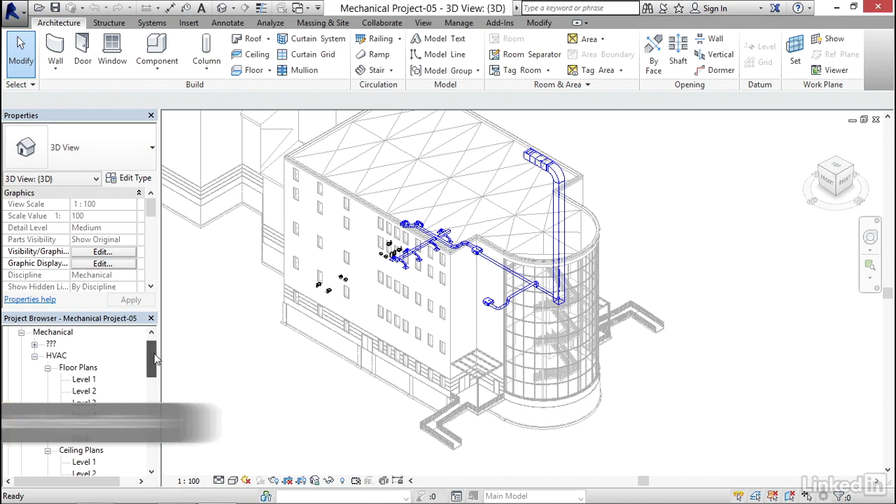In this video, I'd like to create a return duct system. The challenge here is, although we only have a little bit of ductwork in, we're already starting to get pretty congested. So I'm going to scroll down to Ceiling Plan Level 1 right here.

I'm going to scroll into my VAV. The problem is, my return is coming out of here. I don't have enough room to loop it around here, so I guess I've got to come down here. I've got to go up and over, and route it down that way. Okay, we can do that.

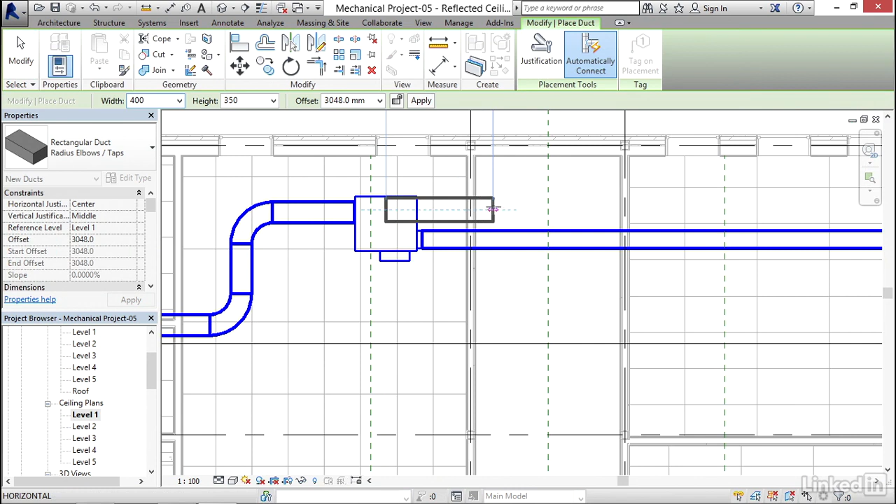I'm going to select my VAV. Now I'm going to go ahead and click on the Create Duct button. I'm going to come out to about here, and I'm going to pick a point. I've got to come down this way, but what I need to do is alter my offset. I'll go 4267. Hopefully that's high enough.

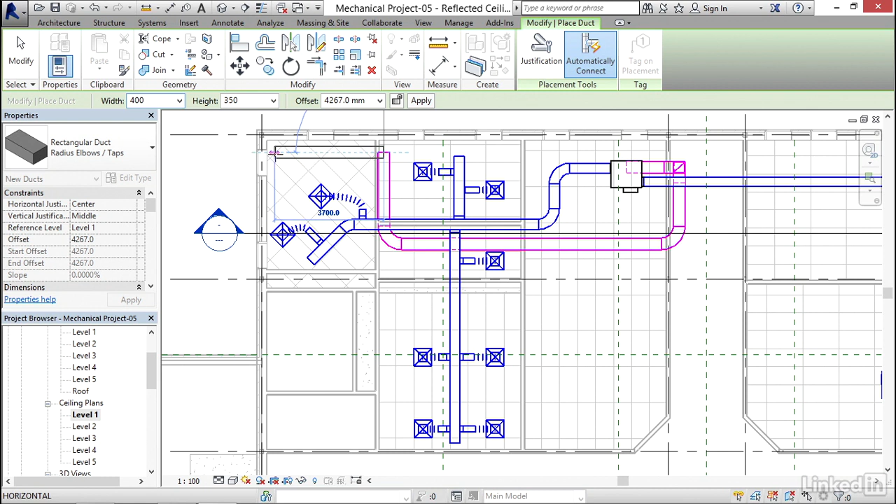I'm going to come down to about here. We got it. Now I'm going to come all the way over to here. I'm going to pick a point. Maybe I'll cross up into here. I'll come all the way down into here. I'm going to hit Escape.

I definitely want to cut a section through this. So I'm going to grab my section marker over here that's not doing anything. I'm going to drag it down to here. I'm going to extend it out. Now I'm going to double click on my section marker.

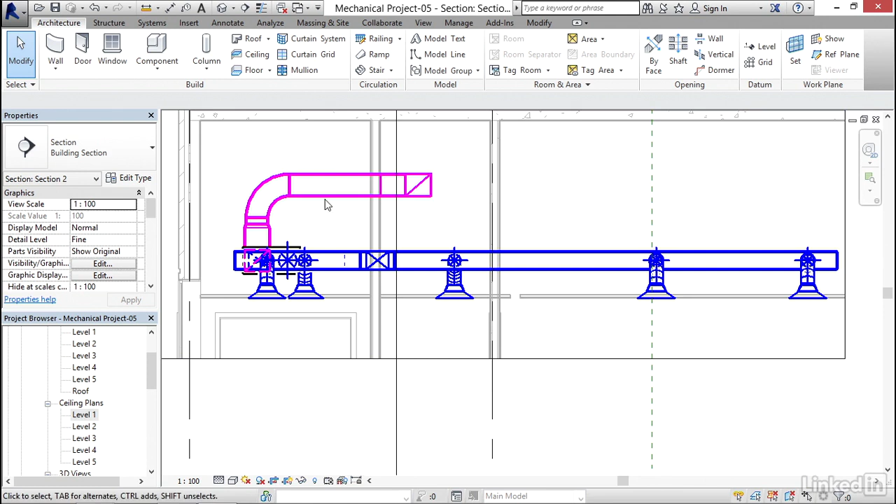Oh, we've got plenty of room. What we can do, even if we want to nudge this down a bit, it's pretty tight, but what I'm going to do is select my duct fitting, and maybe we don't need it to be that big. I can click my drop down, and I can put it on a smaller radius.

Now if I select my duct, and I click my down arrow on my keyboard, notice that I can nudge it down, and my increments are changing. So I can get it as tight as I need to and nudge it down.

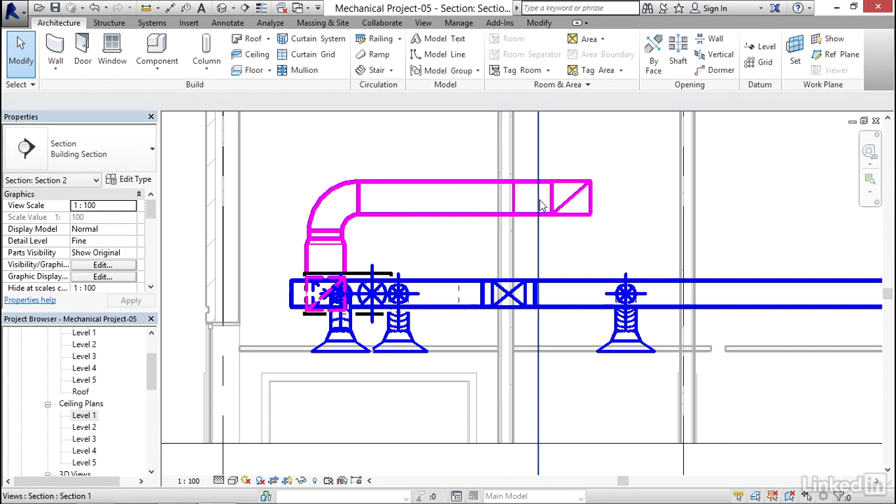Let's go back to our level 1 ceiling plan. Now I'm going to add a return grill right about here. So I'm going to select this diffuser. I'm going to right click, and I'm going to create similar.

Now instead of M supply, I want to click the drop down. Now I want to scroll up till I find M return. And it's right here. M return diffuser, 600 by 600. Click it. I need to change my offset to 2438.

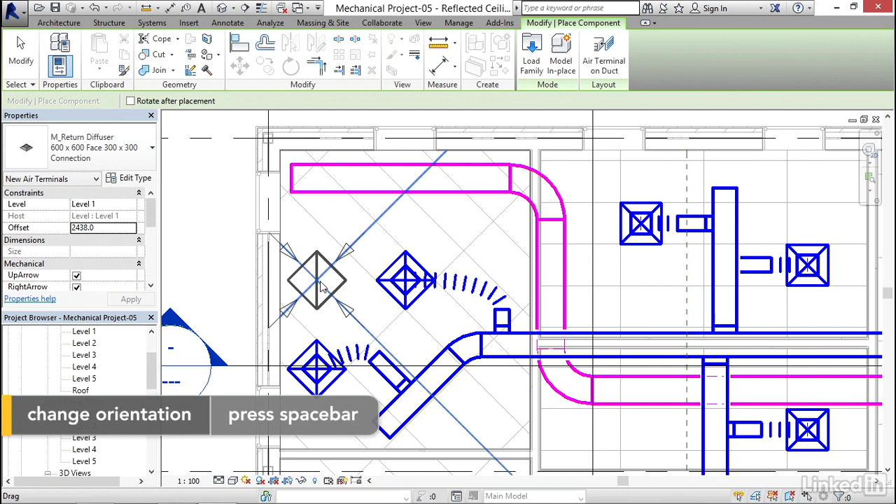Now I am going to put it maybe right about here. So I'm going to hover over this line, hit my space bar. I'm just going to plop it in right here. I'm going to select it. I'm going to click move.

Move it 300 millimeters this way. Click move again, pick a base point, and I'm going to move it 300 millimeters down. Hit escape. But here's a little trick.

I'm going to select this diffuser. Now I just want to click Connect Into to see how Revit wants to do it. So I'm going to click Connect Into. I'm going to select my duct. Okay, it went that way.

Maybe that's not quite the way I would do it, but it worked. It connected it into it. And it turned magenta, so now you know it put it on that system.

I'm going to select this diffuser. Now I'm going to uncheck my flow arrows. So I'm going to uncheck, uncheck, uncheck, uncheck, and hit apply. Beautiful.

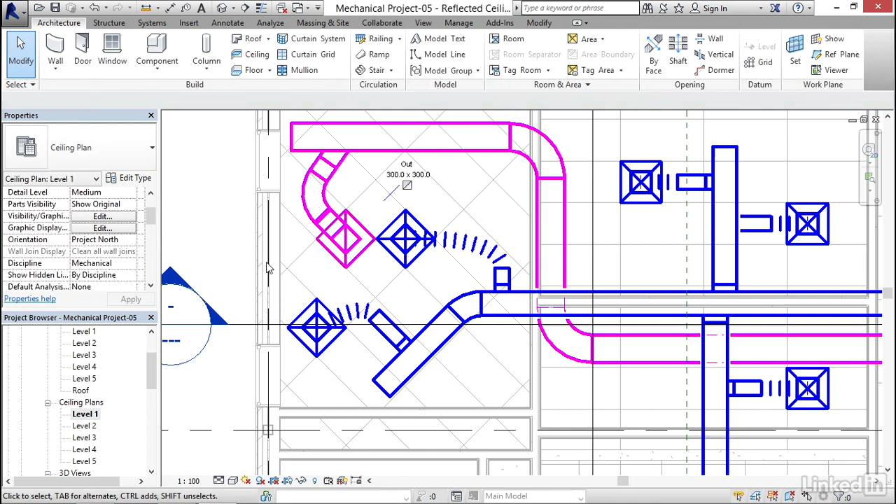Okay, now I'm going to go ahead and select this diffuser. I'm going to right click. I'm going to create similar.

Now I guess I'm going to put one right here. I can kind of line it up with the diffuser that's above it. So if I select the alignment with the diffuser above it, that's fine. I'm going to select that. But what I need to do is type AL for align.

I'm going to pick here. Now I'm going to pick here. Now I'm going to align it.

Now what I'm going to do is draw another duct. I'm going to right click and create similar. I'm going to pick a point right here. I'm going to draw it to right about here.

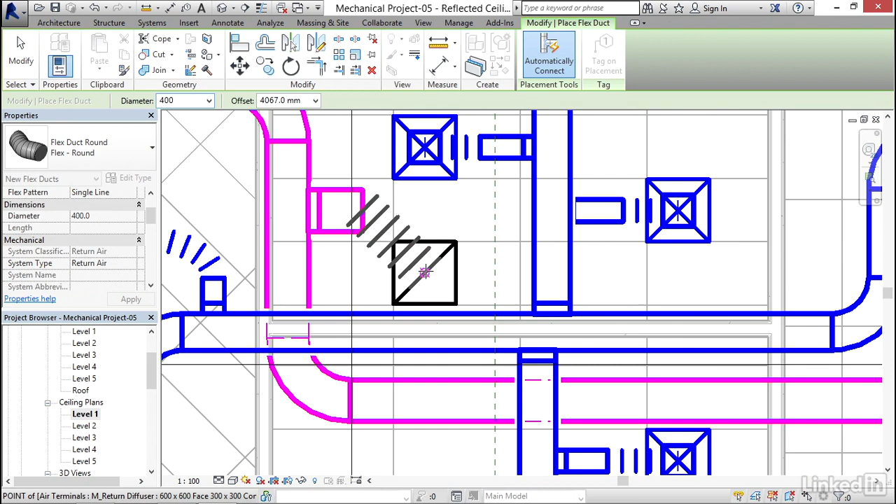Now I'm going to select this. I'm going to right click. I'm going to draw a flex duct. I'm going to flex that down to my diffuser. And it's in there. Now I'm going to draw another duct down so I can catch the ducts in this room. And I'm all set.

So I'm going to select this duct. Right click. Create similar. I'm going to pick a point in the middle of it somewhere here. I'm going to draw it straight down to about here.

I'm going to select this duct. I'm going to right click. I'm going to create similar. I'm going to come down. I'm going to put it right about here.

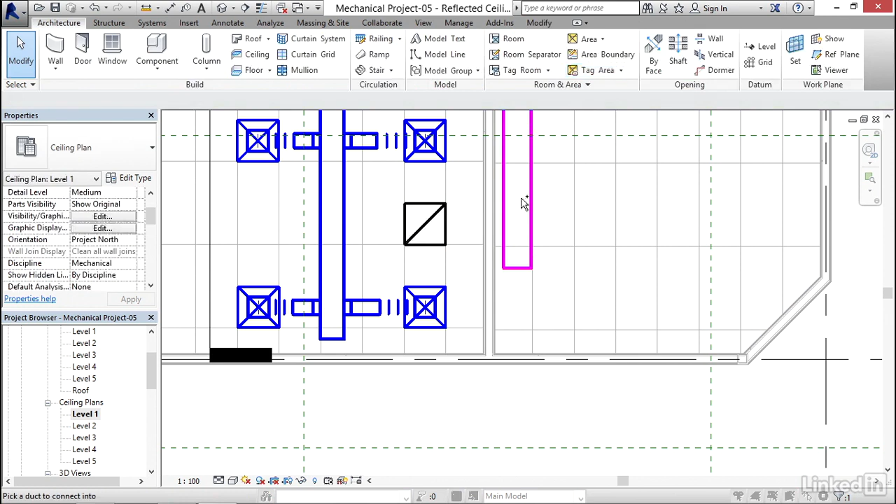I'm going to type AL for align. I'm going to hover over here, line it to there. I'm going to select it. I'm going to click Connect Into. Select this duct here, and it's connected into it.

Pretty neat. So we see we've got a lot of jogging that we have to do already. So if I go to a 3D view, I'm going to see that, boy, we've got a lot of wrapping and dodging and diving, but hey, at least we can get it in there and we didn't have to do anything really special.